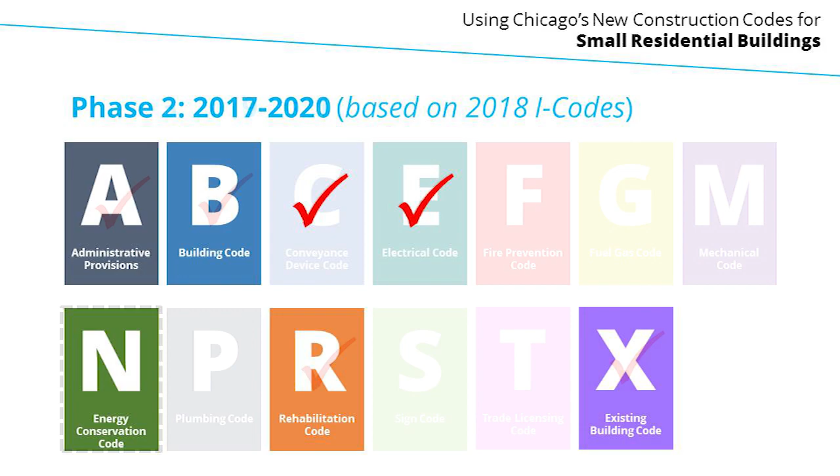But just to acknowledge, there is still more to do. Plumbing and mechanical are currently in the planning phases. We're hoping to work on those codes starting in 2020 and have them phase in with changes in 2021, which will get us through this current cycle. Also touching some things about signs and trade licensing as final pieces to this code modernization effort.

For plumbing, probably some of you in the room are aware of the department's plumbing pilot program that we launched about a year ago, a little over a year. That allows the use of PVC for drain, waste, and vent piping in certain buildings up to 4 stories, a little bit broader than we've allowed in the past. That saved owners a documented 15 million plus to date, and that pilot program will remain in place until we have permanent plumbing code changes, whenever those come next year or later.

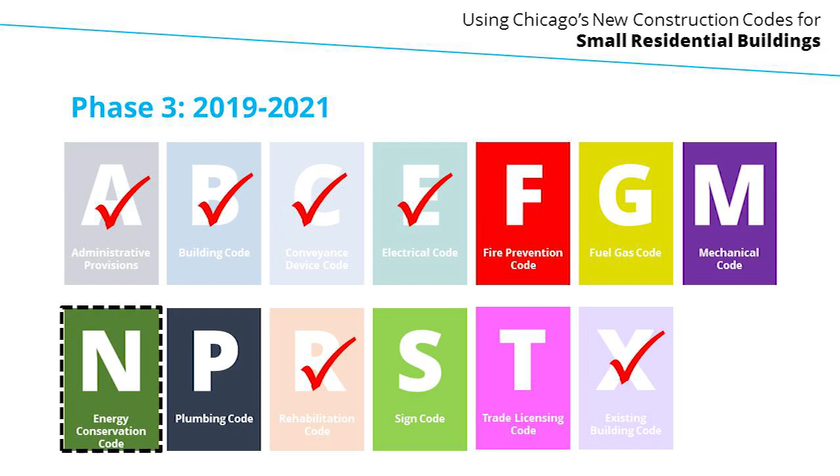The city is also committed to a number of zoning reforms that the mayor is starting to work on with the Department of Planning and Development. We won't be covering those today, but those will be coming too, and part of the city's commitment to working on affordable housing, attainable housing, all sorts of housing, and making our requirements more user-friendly.

So phase 2 would not have been possible without the tremendous amount of industry support that we had, a range of groups. Over 100 groups and firms were involved in the process, including our host today, the Home Builders Association of Greater Chicago. Our former mayor brought all of those groups together, groups that sometimes don't always play nice, brought them into a room in December and made very clear in a memorable way that he wanted this part of the code done before he left office. And the ordinance did pass in April.

So the city had a draft that it had been working on internally for about a year and a half before we started the more external process. But between December and March, the city's initial draft was reviewed and debated, sometimes line by line, by 6 technical working groups. And yes, they did meet in December and almost didn't take a break for holidays because that's what the schedule demanded. So over 70 volunteer architects and engineers.

We have 2 of them here this morning. Lou and Carl, my co-presenters this morning, co-chaired 2 of those 6 working groups. We couldn't have done it without them. And then it advanced to City Council. It was introduced in March, it passed in April, and it's already started to phase in.

So the first thing that phased in was probably the more minor of the changes. Chicago's energy code has updated in the past. It updated again from being based on the 2015 edition to the 2018 edition. It incorporates the 2018 edition of the International Energy Conservation Code and then also the Illinois amendments. Chicago's roof requirements that have been out there for a while about reflective roofs or green roofs are still there. They've just moved to the roofing chapter of the new building code.

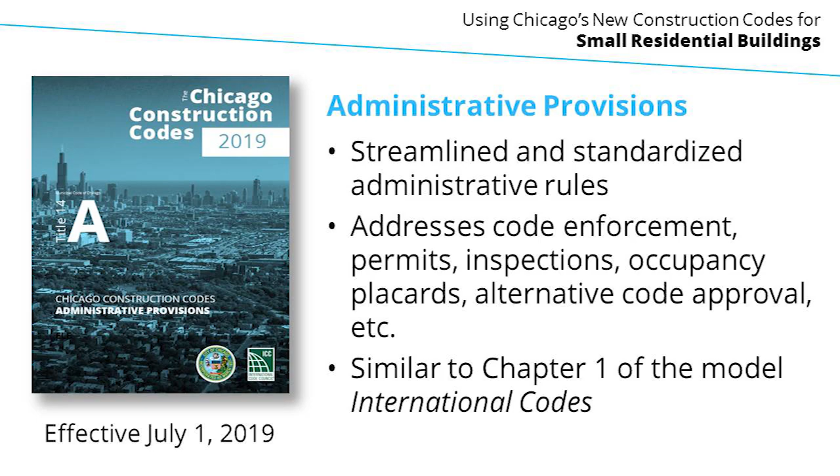In July, new administrative provisions took effect, streamlining the process and the language governing the processes about topics like permit issuance, inspections, stop work orders, and things like that. So those are more internally focused for getting the department ready for this code change. It's largely preserving how those processes worked in the past.

The biggest changes, the ones you're most interested in, I think, are the new building code and the new building rehabilitation code. Those become optional on December 1st of this year and mandatory for permit applications started on or after August 1st of 2020. So we still have about a year before they become required, but there are 2 changes that will take effect a little bit sooner than that.

The first is for projects with accessibility requirements, and I know small residential buildings that we're talking about today often don't have any. The new accessibility requirements, drafted to align with the 2018 Illinois Accessibility Code and changes in the ADA since Chicago last updated its accessibility provisions, will phase in and apply to all permit applications started on or after December 1st of this year.

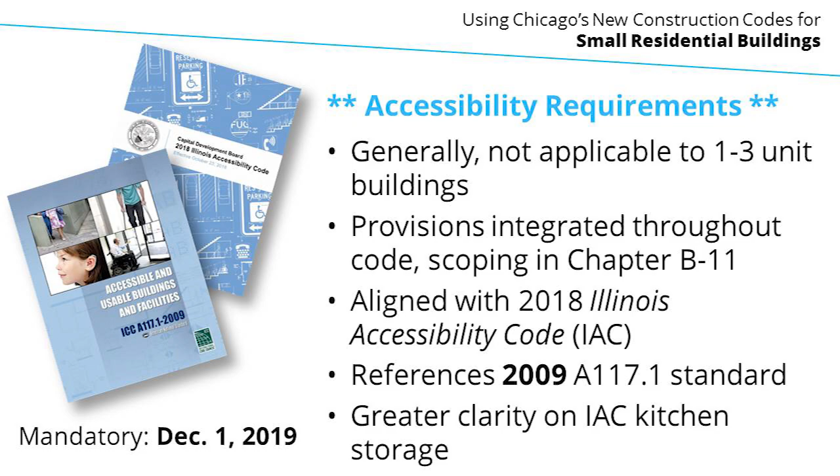And then for residential buildings with 4 or more units, for permit applications started on or after January 1st of 2020, new residential buildings with 4 or more units will have to have a sprinkler system. There are also some specialized requirements if you have co-living or other changes of use. This resolves a long-standing confusion in the interaction between the Illinois Fire Code and Chicago's building code.

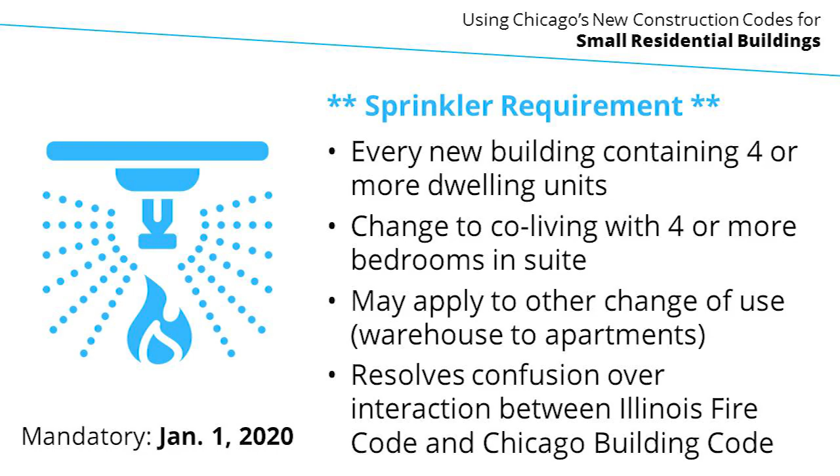We're currently working with the International Code Council, ICC, to publish user-friendly versions of the Chicago Code, so taking Chicago's amendments, which you can find online now, and integrating them with the model code text in one book. So we expect the books will look something like what's up on the screen. There will be a free read-only version available to the public online, and then you will be able to buy print or downloadable electronic versions from ICC.

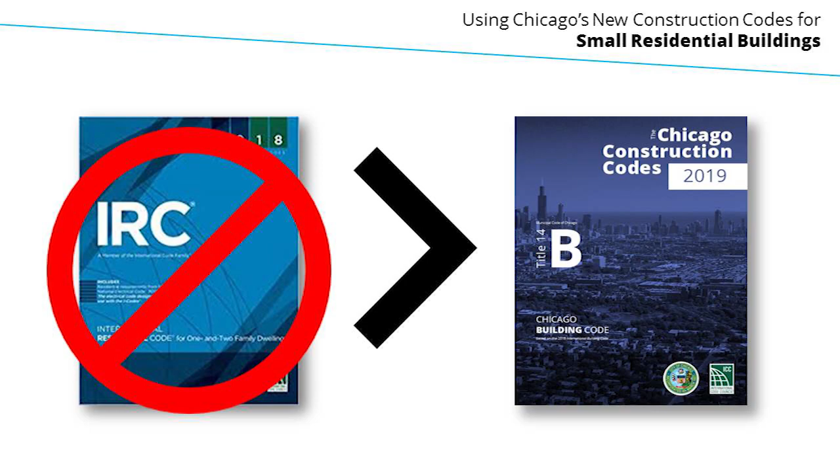So if you work on small residential buildings, what's important to know? First, Chicago did not adopt a residential code separately from the building code. So you may be familiar with suburbs or other places that enforce a version of the International Residential Code. We aren't going to have an equivalent of that here. In Chicago, requirements for small residential buildings will be integrated into the building code book.

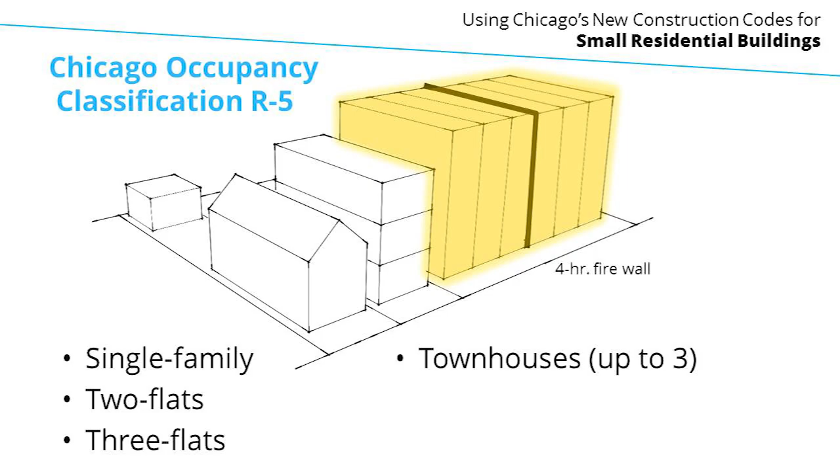To accomplish that, we created a Chicago occupancy classification R5. So you're familiar with the IBC, it has occupancy classification R1, R2, R3, R4. R5 is going to be 1 to 3 unit residential buildings, non-transient, up to 4 stories, and associated garages. Townhouses will qualify if they're in groups of 3, or if every group of 3 is separated by a 4-hour firewall. If they're larger groups of townhouses without that, or larger apartment buildings with 4 or more units, then they'll be group R2, consistent with the IBC.

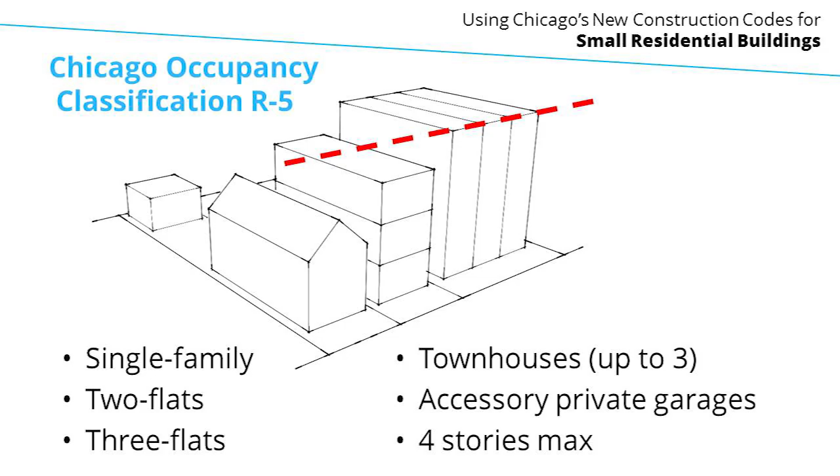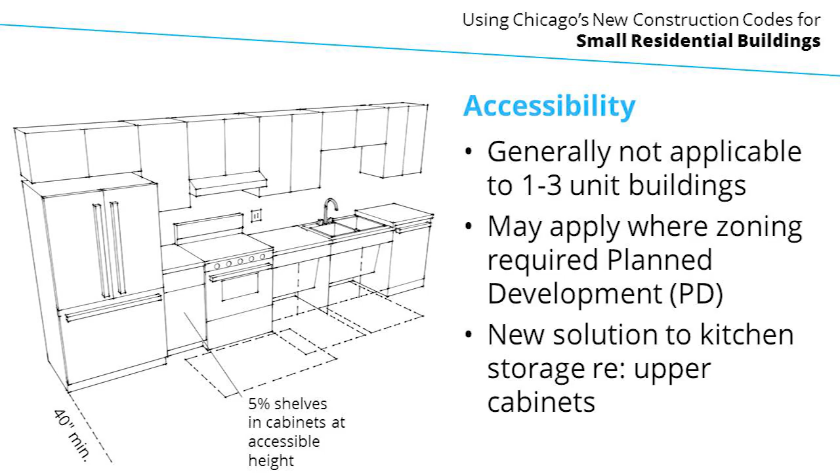What requirements are different for group R5? Recognizing that generally accessibility requirements don't apply unless the project receives zoning approval through the Planned Development process, accessibility generally won't apply. Of course, the city always encourages accessible design features or universal design features where possible.

Sprinklers also will not be required in Group R5 buildings, 1 to 3 unit buildings, as today. Also as today, there will be bonuses or exiting trade-offs in buildings that do have sprinkler systems, and NFPA 13D, which are generally only allowed for 1 and 2 unit buildings, will be allowed in 3 unit buildings up to 3 stories to get those same trade-off benefits in Chicago.

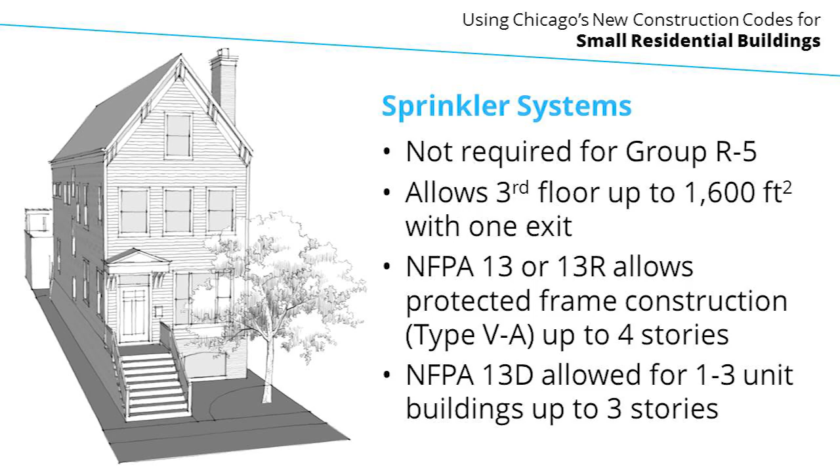While today the wind engineering requirements in the Chicago Code are the same for a 1-story single-family home and a 15-story hospital, in the new code, those standards for small residential buildings will be reduced, consistent with the national standard, ASCE 7. It's about a 20% reduction, although it's not perfect math.

Seismic will apply to some larger buildings in Chicago. You may hear that seismic is coming, but for small residential buildings, seismic is never going to control, and for 1 to 3 unit buildings, you can ignore it entirely. There's also some prescriptive options out there in the IBC that are available for these small residential buildings if they're wood or metal frame.

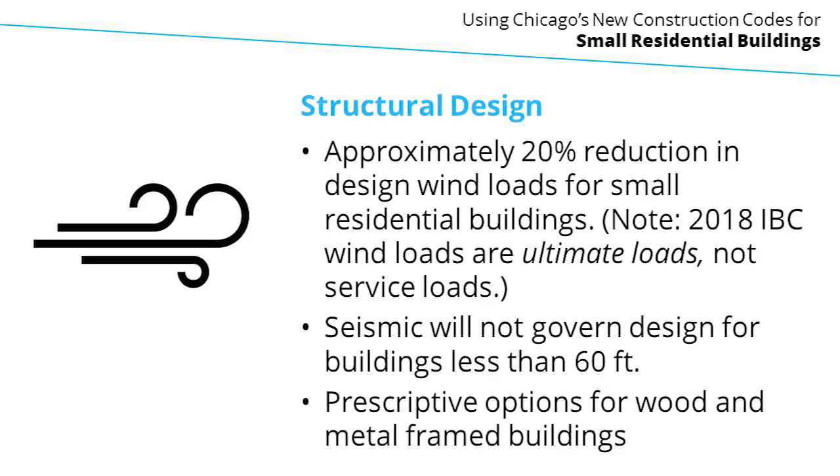Standards for private porches and decks, also balconies, will be changed to be more consistent with national codes. So when it's a shared or common porch or deck, it will have the same standards as today, 100 pounds per square foot. But a private balcony, deck, or porch for a single family home, for example, will be reduced to a design live load of 60 pounds per square foot.

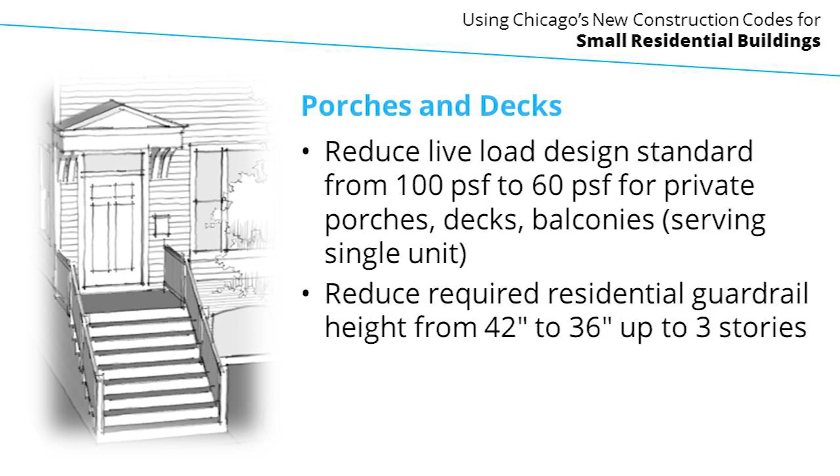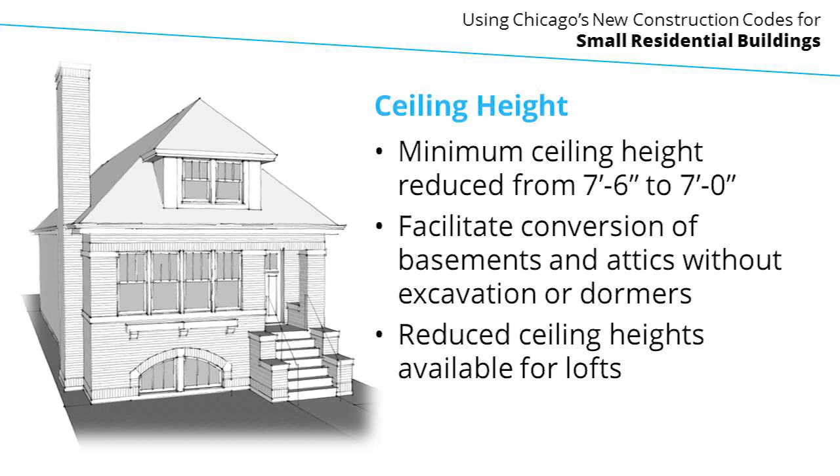The minimum guardrail height is also changing in residential units up to 3 stories. That's reduced from 42 inches today to 36, again consistent with the residential requirements applied elsewhere. The minimum ceiling height within a dwelling unit will also be reduced from 7'6" today to 7 feet. We expect this will make it easier to legally convert existing basement or attic space without expensive excavation or structural changes. In R5, Chicago's current provisions for steeper stairs and tighter winders will also remain in effect, so I know that's important for building on our small lots especially.

There are also some new provisions in this code for allowing lofts that would be accessible by stairs or ladders up to 150 square feet. And that applies within any type of dwelling unit if that's an option that is of interest to you. And that comes from the model residential code. And in larger buildings, common stairs are going to be meeting those national rise-run standards.

The other thing to keep in mind, IBC and IRC have this idea of egress windows, that people are going to be exiting out their windows. We will not have that requirement in Chicago. Many of the exiting requirements stay the same as they are today in terms of one exit and stair sizing, especially in these small residential buildings where our land development patterns are adapted to that.

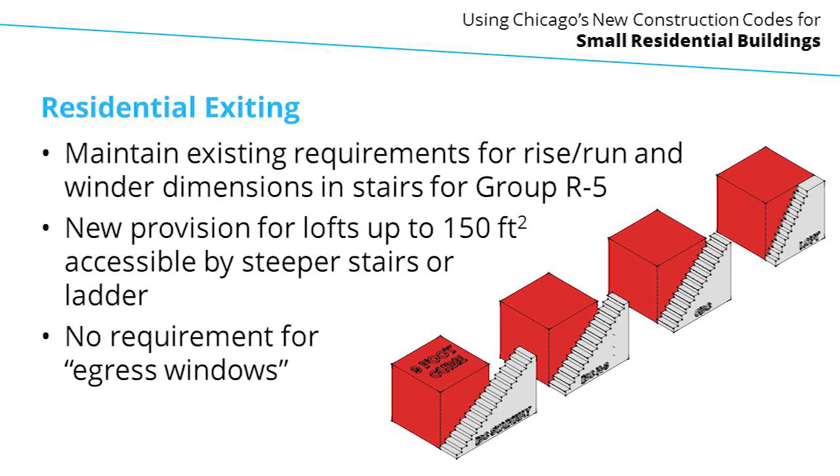So now I'm going to turn things over to Lou Wilson to speak a little bit more about some of the projects that he works on all the time and give you some more detail about this new code.